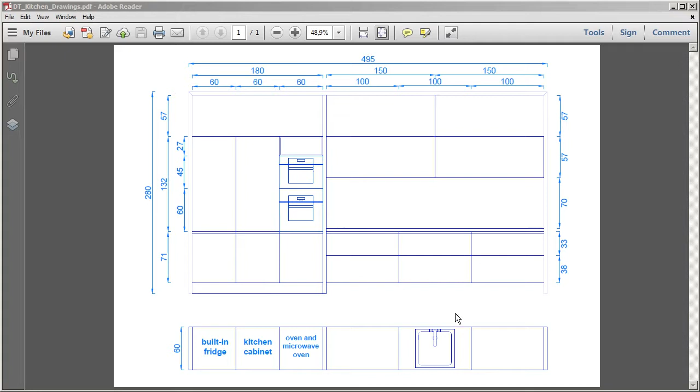On the right side we have 4 huge kitchen cabinets, below that countertop with faucet and sink, and below that we have 6 drawers. Here on the very bottom you can see we have 15 centimeters high toe kick, and on the right side we don't have toe kick because here we will place small LED lamps. Here in the middle we have a 5 centimeters thick plank, and we also have 3 more planks around the kitchen. That was our main part.

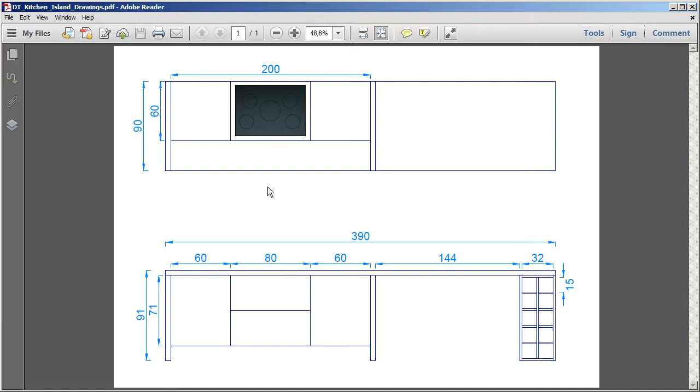Now let's take a look on kitchen island. We have here on left side 1 kitchen cabinet and the same one on the right side, and here in the middle we have 2 drawers. We have here wine shelves, and here on the top countertop with induction hob, and above that we will place cooker's hood. Now let's jump real quick to our scene.

For this tutorial I prepared a simple scene. Let's hide the ceiling real quick.

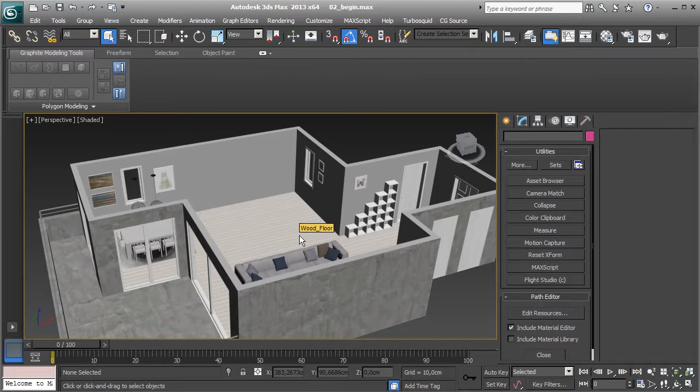Yes, you can render your kitchen in studio setup, but from my experience I know that clients really prefer to see their kitchen in their own apartment or house. So it's always good practice to go in their home, take a few photos, make measurements, and then come back and try to recreate their apartment or house, and then place the kitchen in their home. It will really pay off, trust me.

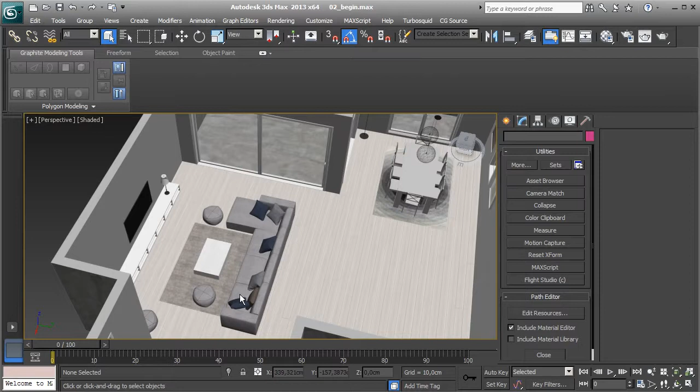Okay, here we have a simple dining room with table, carpet, and a few chairs. I've placed here a few paintings and 2 ceiling lamps. We have here a living room with simple sofa and carpet, coffee table, TV, and shelves. You don't really need to go too much with details, you don't really need to fill these shelves with books and something else, but making the dining room and living room something simple like this will really bring up your renders. So that's it for this lesson.

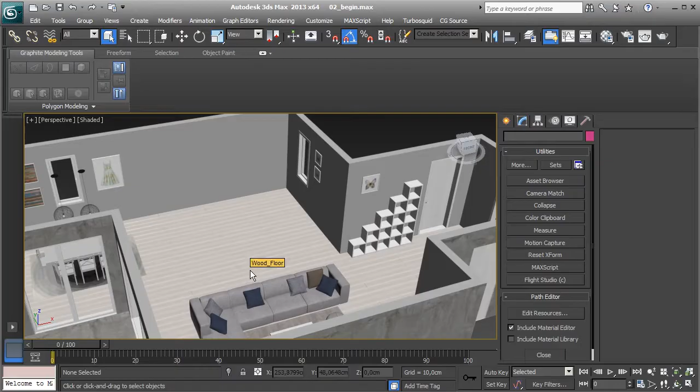In the next lesson we will make our kitchen blocks. Make sure you have correct settings here. Right click on snap toggle icon and make sure you have checked vertex only. Now open up the layers menu and make a new layer to keep things organized, and we are ready to go.

Now let's take a quick look on our CAD plans again, and we will start by making these 3 surrounding planks. They are 280 centimeters high and 495 centimeters wide, and we have a width of 60 centimeters.

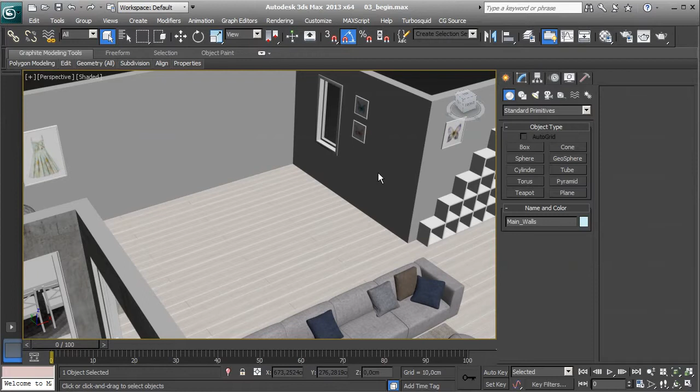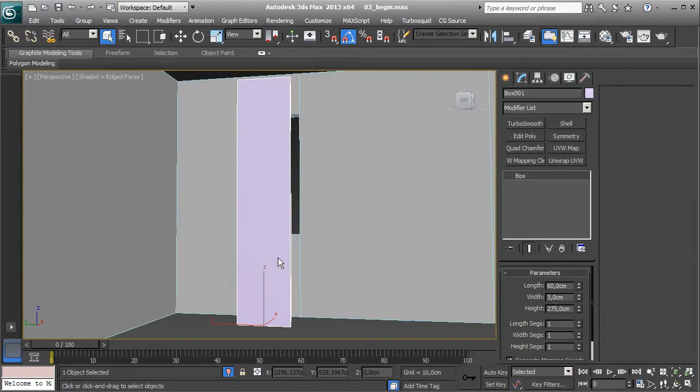So let's take our walls and press Alt Q to isolate them, and we need to create a box here and type in dimensions 60, 5 and 275. Now zoom in, and I will activate or deactivate snaps by pressing S on keyboard. So let's snap this box to this corner. Okay, convert that to editable poly.

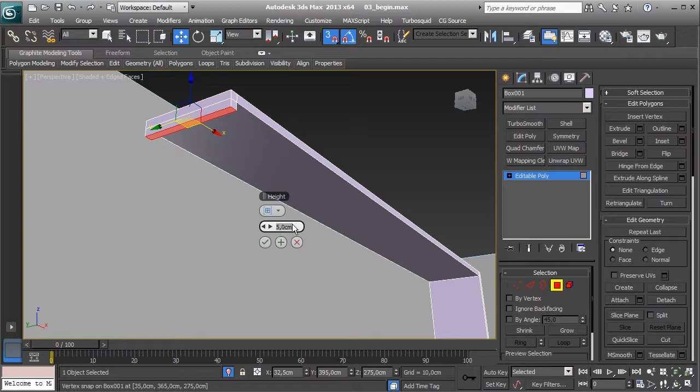Select this polygon here and extrude by 5 centimeters. Okay, now extrude this one by 485, hit plus button, and 5 more. Okay, and now select this one and extrude by 275. Okay. Now we have our surrounding planks and we can move on.

Let's isolate that. Now we will start by making the toe kick. In this case it is 15 centimeters high. It can be 5, 10 or 15. In this case it is 15. And it is 180 centimeters wide. Okay.

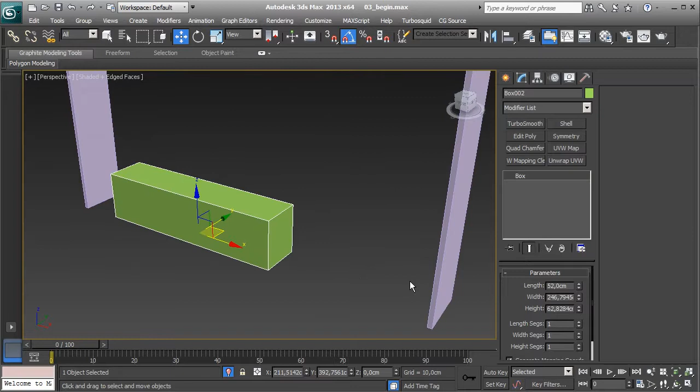A new box. We will make it 52 centimeters deep, but it can be from 50 to 55, something like that usually. And 15, zoom in and snap it to that wall. Okay.

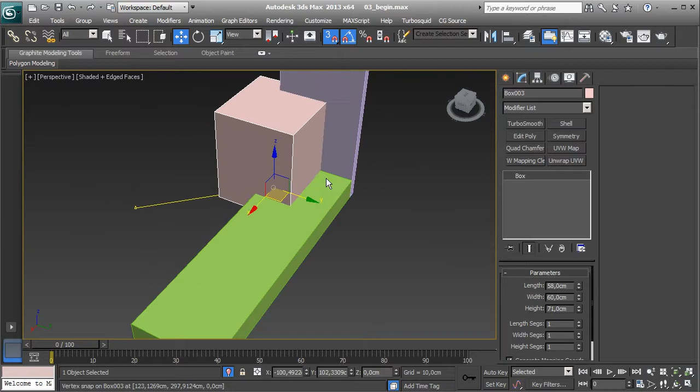Now these 3 kitchen cabinets, they are 71 centimeters high and 60 wide. Okay, one more box. 60, 71, and we will put 58 length because we will make 2 centimeters thick doors on them after. Okay. Shift and drag to make a copy. Snap again. Shift and drag. And snap.

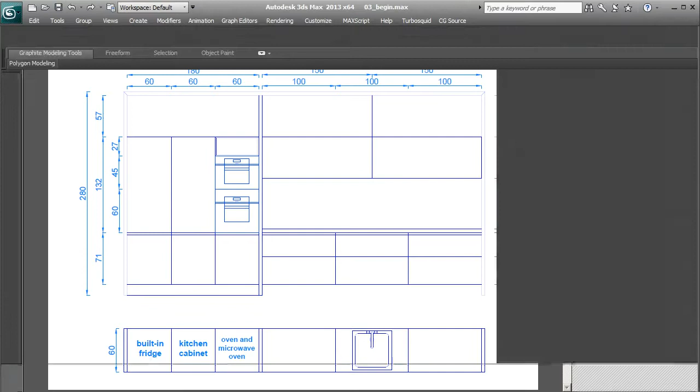Okay. Now we need to make these 2 kitchen cabinets and they are 132 centimeters high. So let's copy this box once again. And snap. Copy and snap. Okay. Now we have oven and microwave and this small shelf.

Ovens are usually 60 centimeters wide and 60 centimeters high. So copy this box one more time. 60. Snap.

Now we need to make our microwave, 45 centimeters height. And we need one more box for our small shelf, 27. Okay, and we need one more box here on the top for our kitchen cabinet.

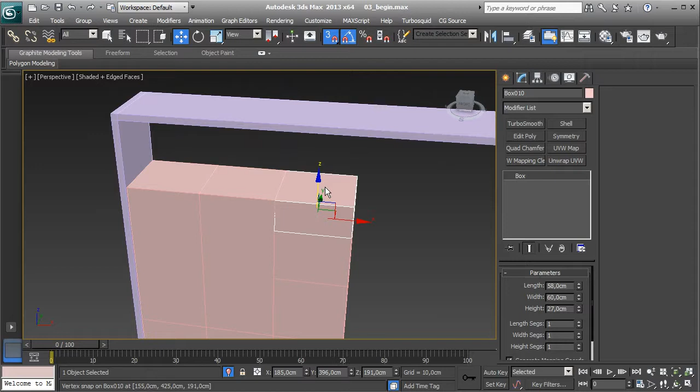Make one more copy. 180 and height, I guess 57. It is. And we can snap that right here. Okay. Now we need to make this plank.

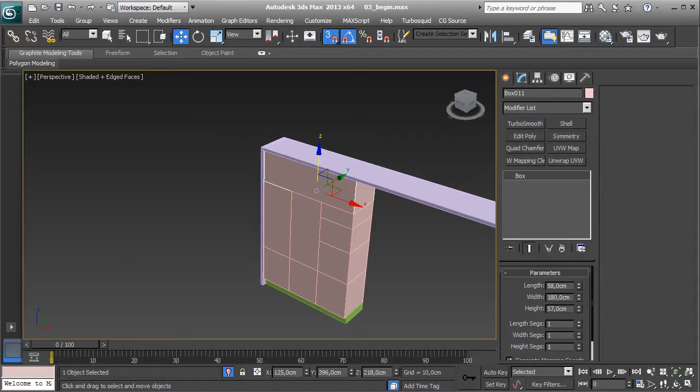Okay. Create a box. Okay. 275, 5 and 60. And snap that here.

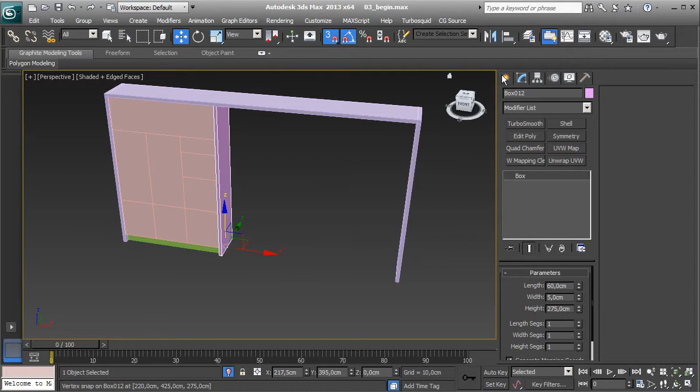Okay. Now we will create these 4 huge kitchen cabinets and they are 150 centimeters wide and 57 centimeters high. Okay. Usually top cabinets are between 30 and 35 centimeters deep. In our case they will be 35, so we will make this box 33 because we will have doors 2 centimeters thick again. 150 and 57.

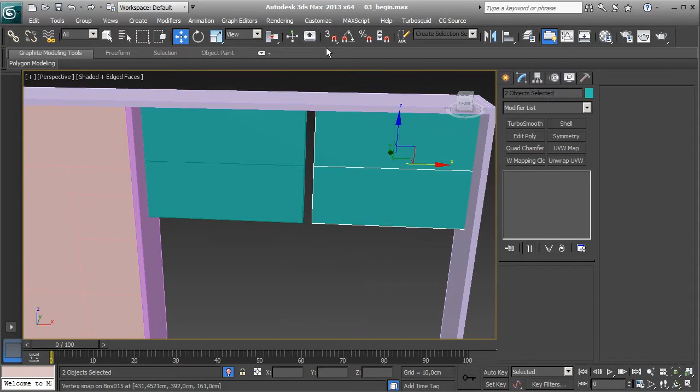Okay, and let's snap that here. Create one copy and snap. Select them both. Shift and drag. Okay, now we have to make these 6 drawers and countertop. So let's create one more box.

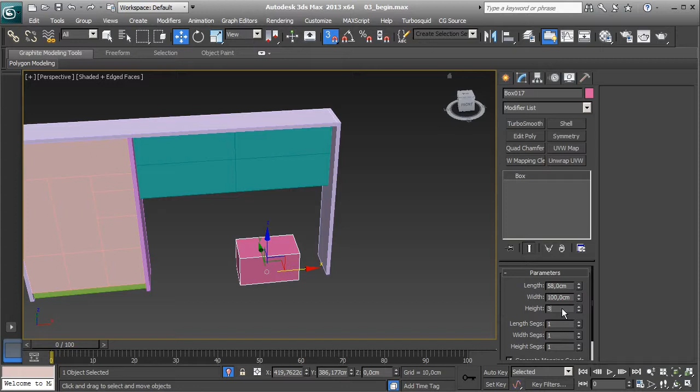58, 100 and 38. Let's snap it here and move it up by 15 centimeters. Okay, shift and drag to make a copy, snap, one more copy, and snap. Now second column here, 33 centimeters.

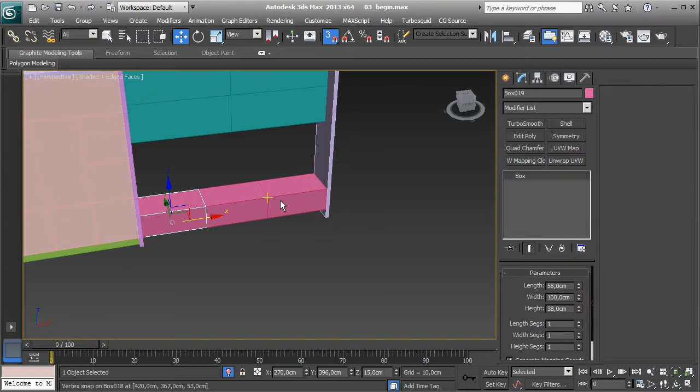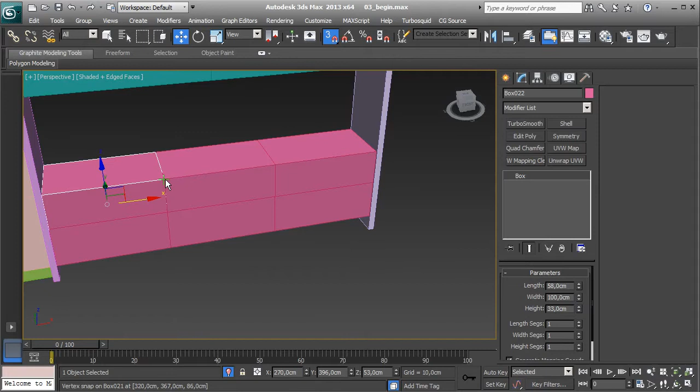Okay, snap, copy, snap, copy. And we need to make our countertop. Okay, so 60, 300, 5 centimeters thick, and we can snap it right here.

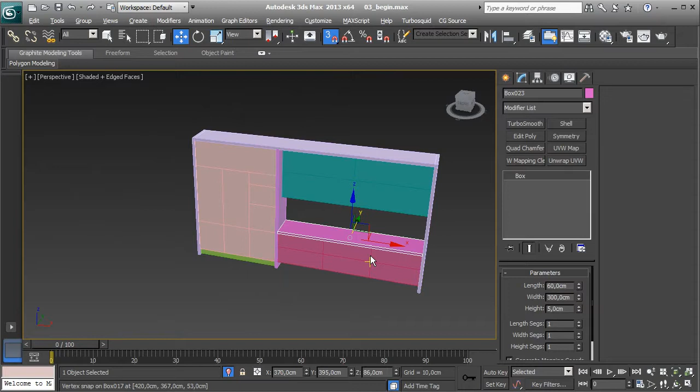Now when we have the main part of our kitchen blocked out, we can start working on island in the next lesson. Let's take a quick look on our CAD plan again.

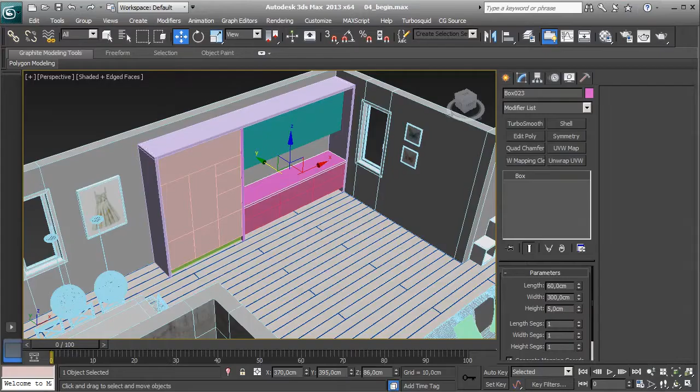Let's take our walls again and isolate them and create a new box. Okay, 5 centimeters, 390 and 90.

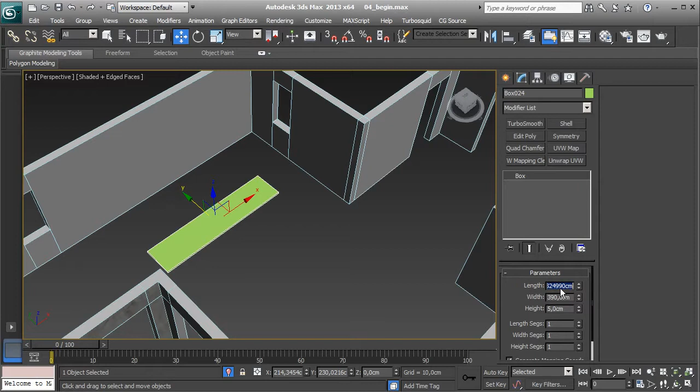Let's move that here, zoom in a bit, turn on snaps and snap it to this vert here. Okay, now I will turn on absolute mode here and we will move countertop 86 centimeters up and we will move it from window 10 centimeters.

Okay, now we can isolate countertop and we will create these wine shelves. Every piece here is 2 centimeters thick and we need to create first one box here, 92 and 86. Okay, turn on snaps and snap it to this corner.

Now create a copy and snap and move by 15 centimeters. One more copy and snap it right here and move by 15. Okay, one more box,

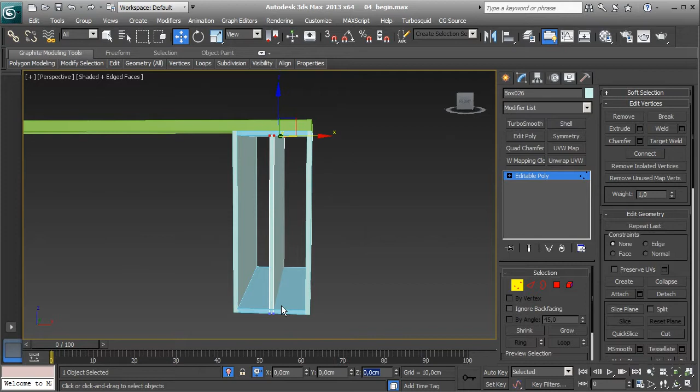Convert it to editable poly, and move down these top verts by 2 centimeters and move up these 4. Okay, now select these edges and hit connect, make 4 segments. Okay, chamfer them by 1 centimeter and hit OK.

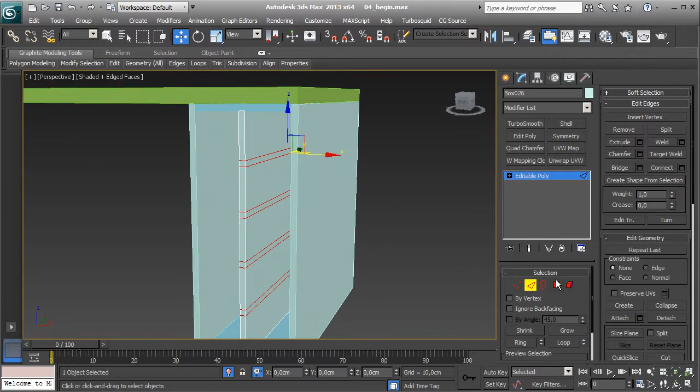Now select these polygons here and hit detach and detach them as a clone. Okay, now select these polygons on other side and same thing. Now we can delete these edges, we don't need them anymore.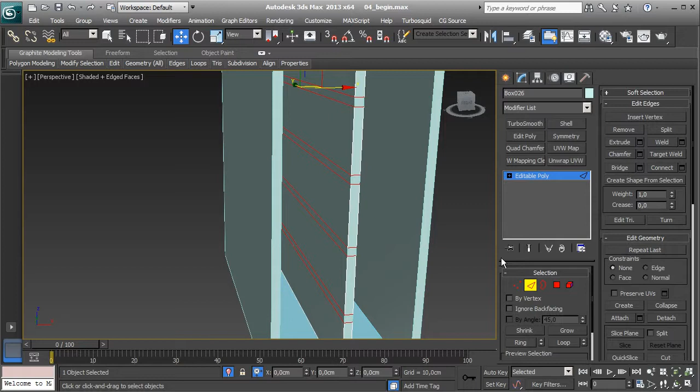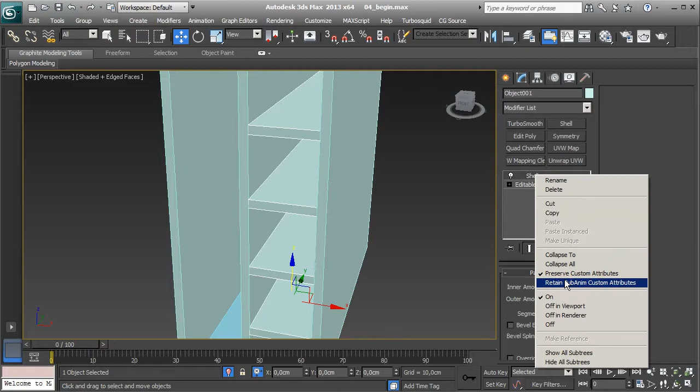Now select these polygons and apply shell modifier with 15 centimeters outer amount and collapse that and convert that to editable poly. Same thing with these polygons on this side, so apply shell modifier and collapse that.

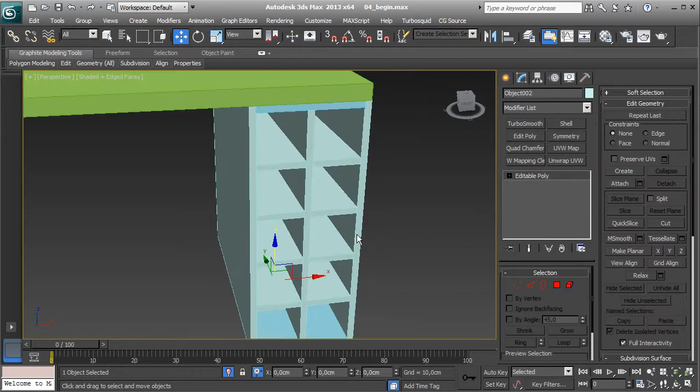Okay, now we can move on other side. On other side we have 5 centimeters thick plank, 1 kitchen cabinet, another one, and 2 drawers. So let's create them.

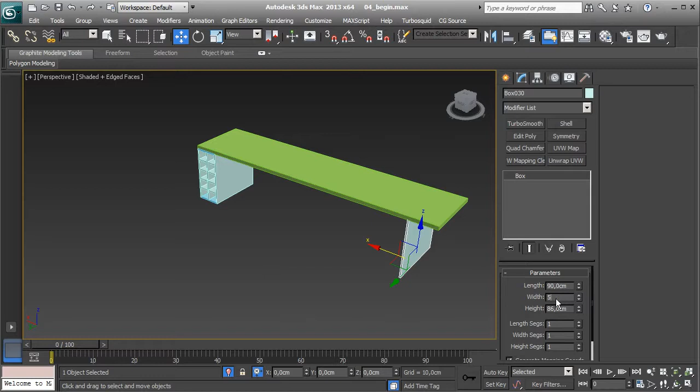Take this box here and make a copy, change width to 5 centimeters and snap it to this corner here. Okay, now we need our boxes for cabinets. Let's change this length value to 58 again, because we will have 2 centimeters thick doors, width to 60 and height to 71. And let's change the color so we see the difference and snap that here.

Now we need one more copy, and this will be box for our drawers, so 35.7 and 80, snap, copy, snap, and one more kitchen cabinet, snap.

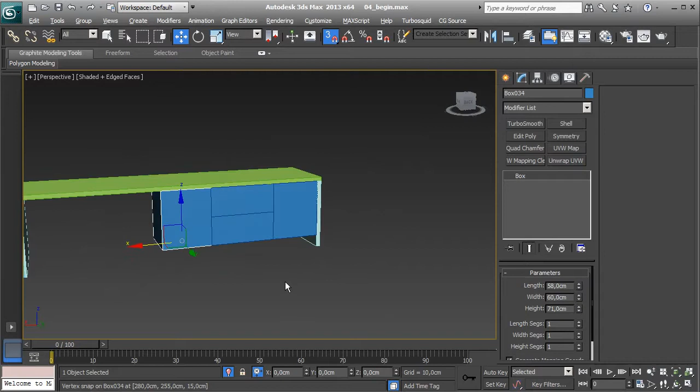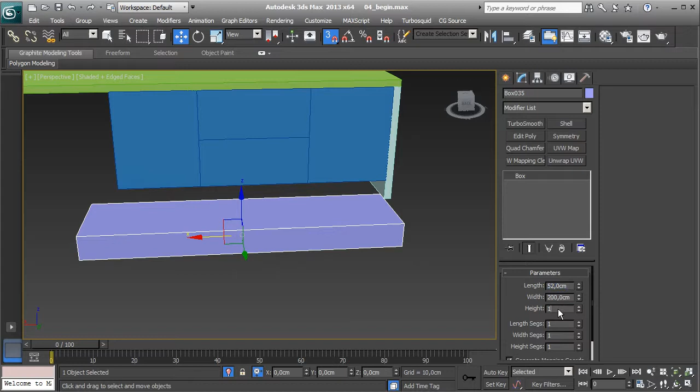Okay, and now we need one more box for our toe kick, and it will be 200 centimeters wide and 52 and 15. And let's grab it and snap.

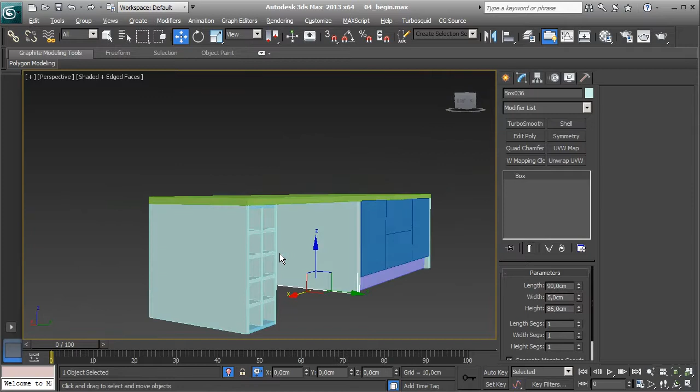Okay, and one more thing, we need one more plank on this side. Okay, and snap it. Now select these boxes here and push them in 2 centimeters so we have space for our doors.

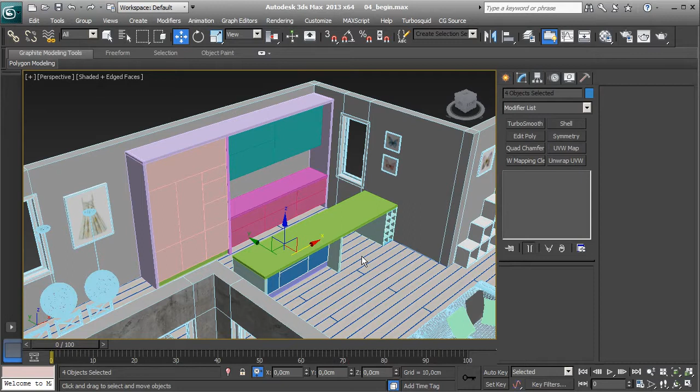We have blocked out our kitchen and we can move on. We have doors with built-in handle and we have doors without handles, so you can open them by pressing this area here or this area here or here.

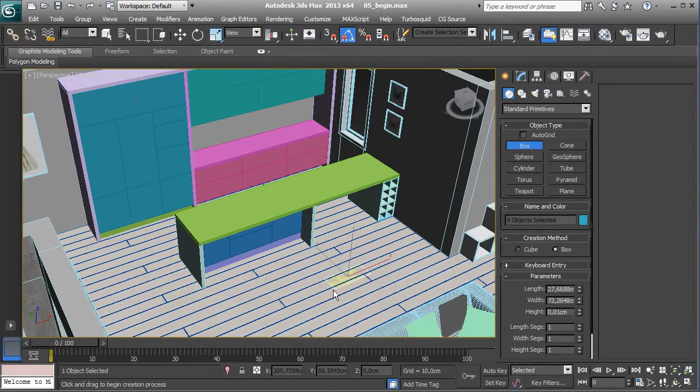We will start by creating doors with handles, and as you can see I've changed the color of these boxes so we can see edges much better. So let's create a box here and let's go to isolation mode and type in dimensions for length 2 centimeters, width 60 and height 67. We need doors to be 71 centimeters high, but we will start for now with 67.

As you can see, we have thickness of 2 centimeters, but in real world doors are usually from 1.8 to 2.2 centimeters thick. I always use 2 centimeters thickness in 3D because it's much easier to work with round numbers, and also these few millimeters won't be visible in renders.

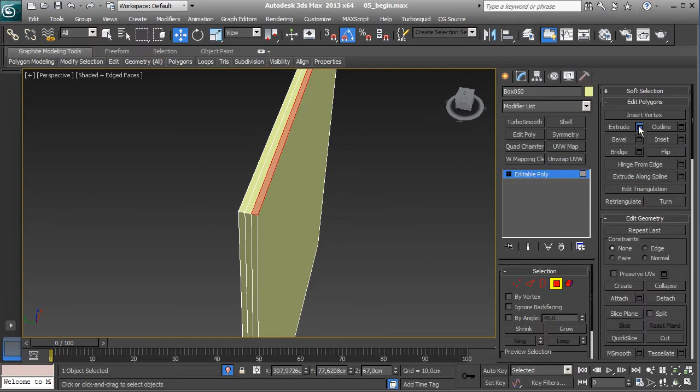So we can convert that to editable poly. We select this edge and hit ring, connect with 2 segments, extrude this polygon 1 centimeter and extrude this one 4. Now we have 71 centimeters high doors.

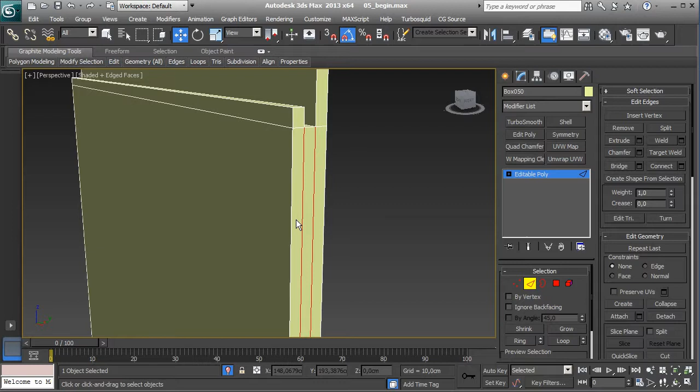Now we can select this loop and this loop. I'm selecting the loop by double clicking on edge, and I will delete them by pressing Ctrl and backspace. Same thing with these edges, but I will deselect the inner edges.

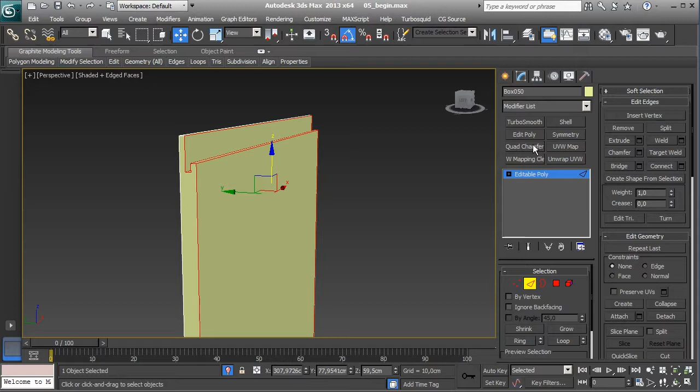Now I will select all edges with Ctrl A, and deselect these edges. Now I will apply quad chamfer modifier. If you don't have quad chamfer installed, I will provide a download link in reference files, and if you are a latest Max user, you should have that modifier by default. So apply quad chamfer, amount 0.2 with 2 iterations, and collapse that.

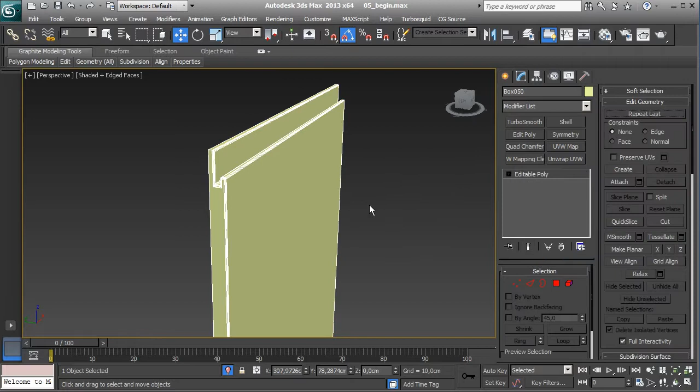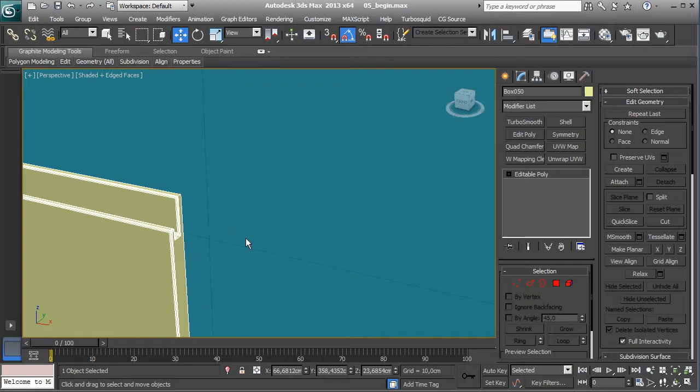Okay, now we have our doors and we can start placing them. Let's bring up the layers menu and hide everything except kitchen. Press Z to zoom in, and now turn on snaps.

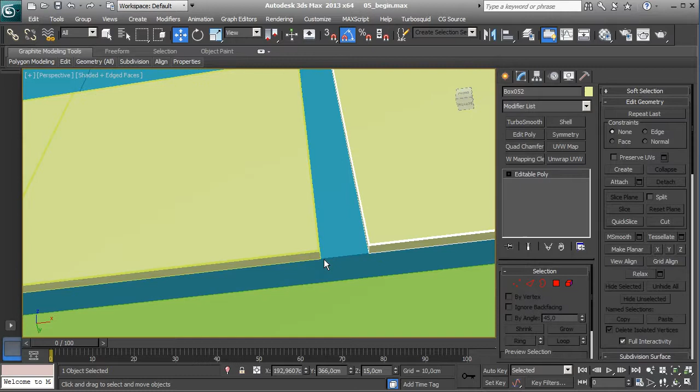We will snap doors in place, create a copy. Okay, one more time, snap and copy, and snap. Now we need doors for kitchen cabinet and built-in handles.

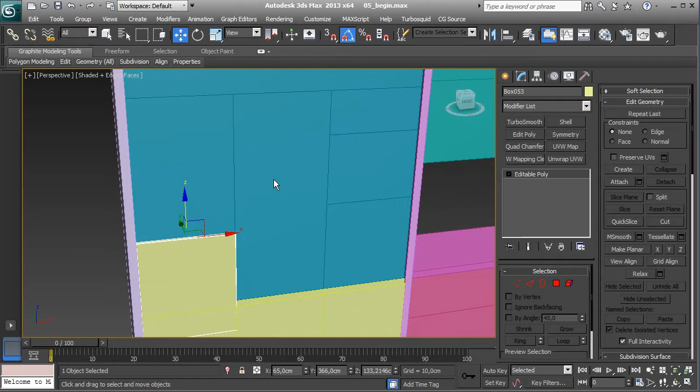Now you will see why I didn't chamfer every edge on that doors, so we have good snapping points, and we can change the dimensions of doors anytime. So move them down a bit, zoom in, and snap.

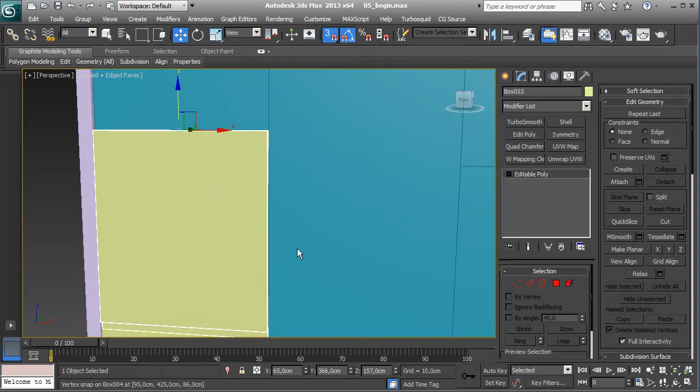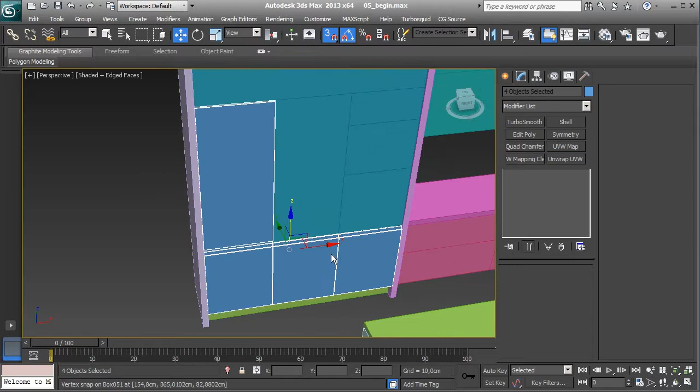Okay, and now we can select these doors, move them up, zoom in, and snap. And let's change color of these doors also so we can see them better, to something like that. Okay, and make a copy and snap.

Okay, we have this little box here that represents our future shelves, so let's convert that to editable poly, and let's bevel that polygon by 2 centimeters, inset by 2 also, and extrude in by 58. And we have our shelf here.

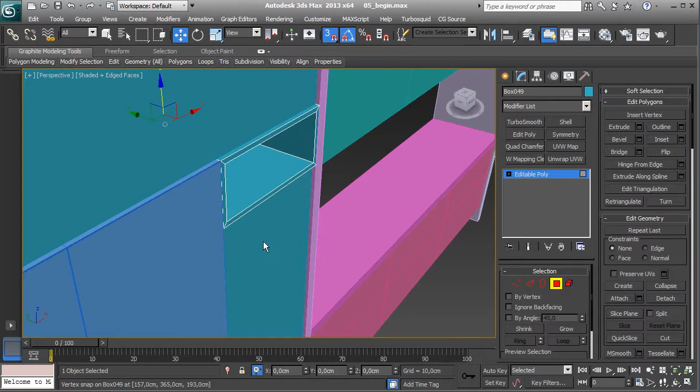Okay, here is the place for oven and microwave, and we will make them later. Now we can copy that doors.

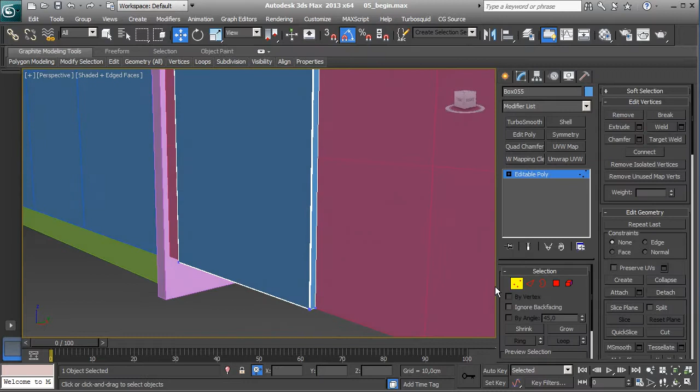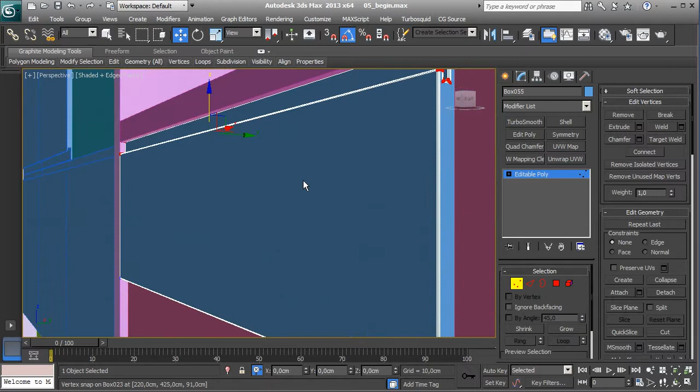Actually we will snap that here, and now we'll snap these doors here and select these top doors and push them down. And snap.

Now we can create 2 more copies, and we can also snap them like that.

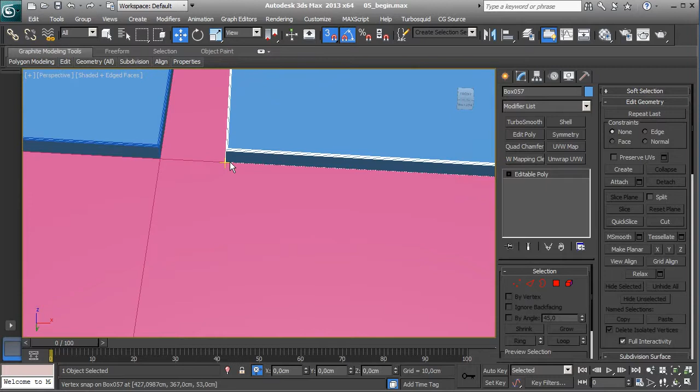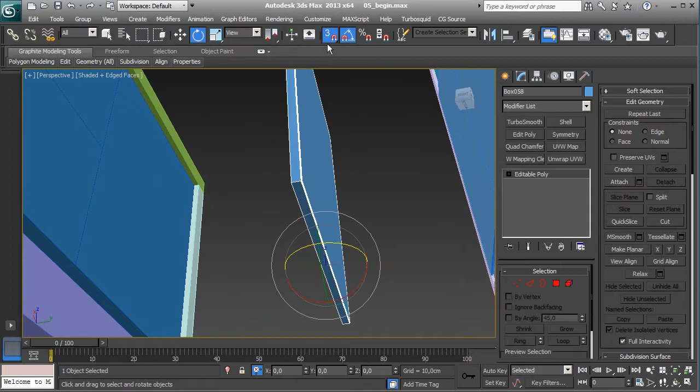Okay, and now we need 2 more doors, actually 3 on our island. So create 1 more copy, rotate that by 180 degrees, zoom in and snap. Like that. Okay, and let's change color here too.

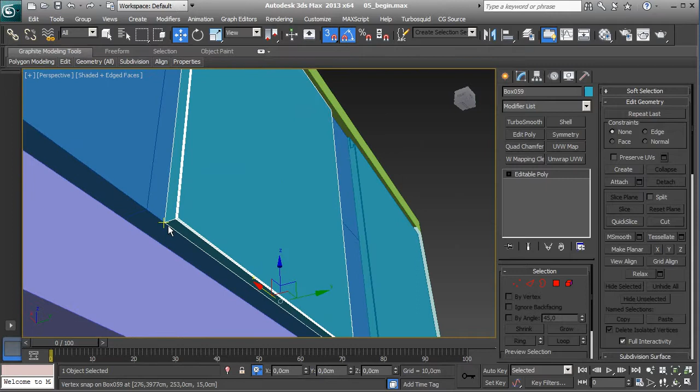So we can see the difference. Create a copy again, turn off snaps. Okay, now select that doors and snap them, and push this up.

And now one more time, shift and drag to copy these doors. And snap.

Okay, now when we have all our doors with handles finished, we can move on, and in next lesson we will finish the rest of the door.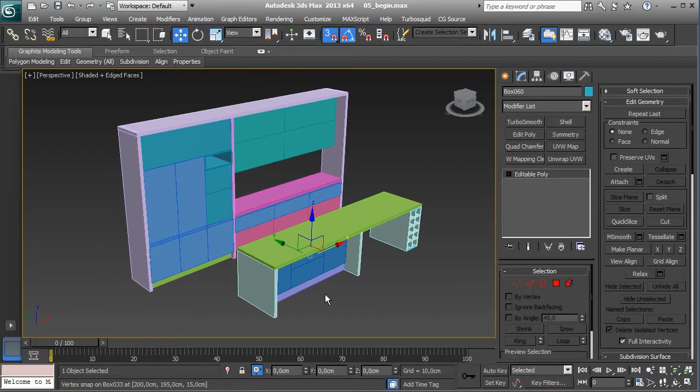This box and create a copy, and we will change length to 2 centimeters and snap that right here.

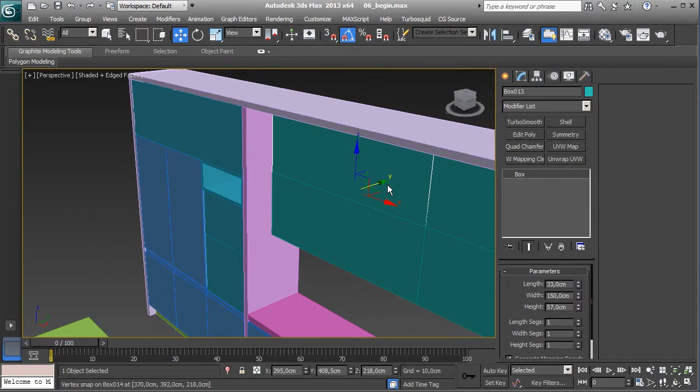Okay, now we can make a copy of that box. Let's change color to something more visible and change thickness to 2 centimeters and snap that right here.

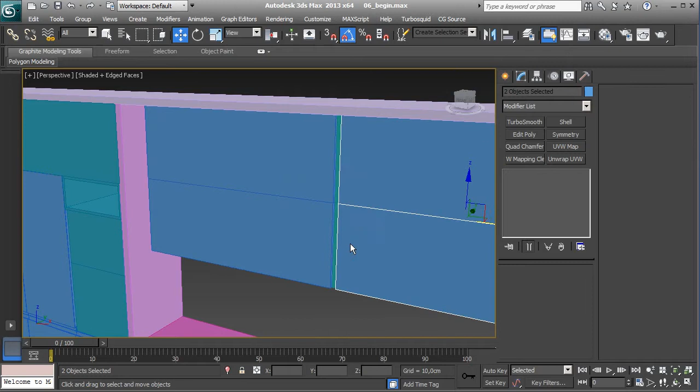Make a copy, snap, select both boxes and copy them and snap.

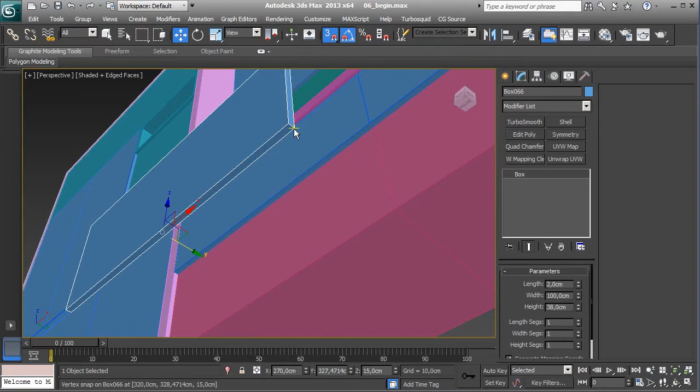Okay, now we need to copy this box, change thickness to 2 and also change color to blue, and snap. Copy, snap, and one more time.

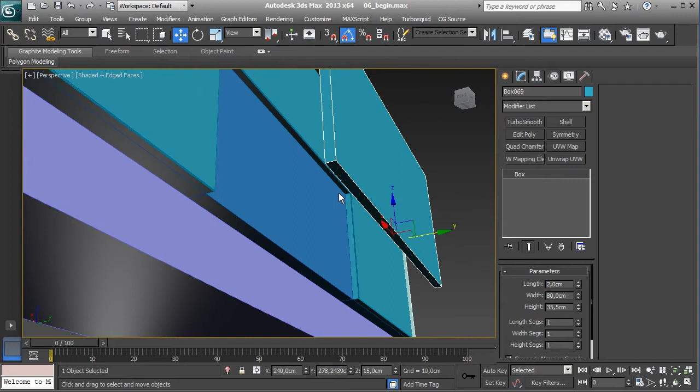Okay, and we need one more box here on this drawer. So create a copy, change color and thickness, and snap like that.

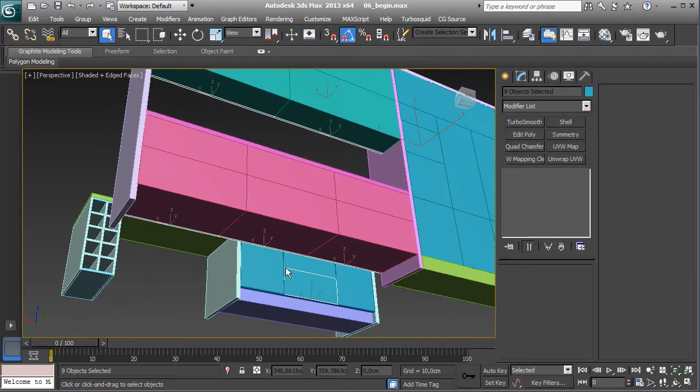Now we can select these new boxes and this one, and we can apply edit poly modifier, select all edges and chamfer them. 0.2 with 2 iterations. We chamfered all edges so we can catch up lighting nicely and reflections in our final renders.

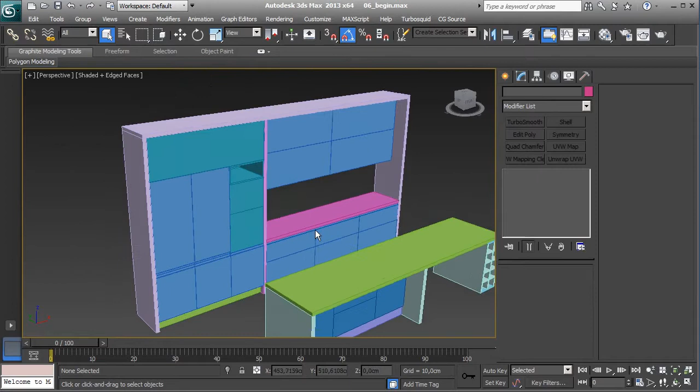Okay, now we can create 2 more boxes here for oven and microwave, and we will model them later. Snap, copy, and snap.

Now we can select countertop and these 2 side planks, and we can also chamfer them, 0.2 and 2 iterations.

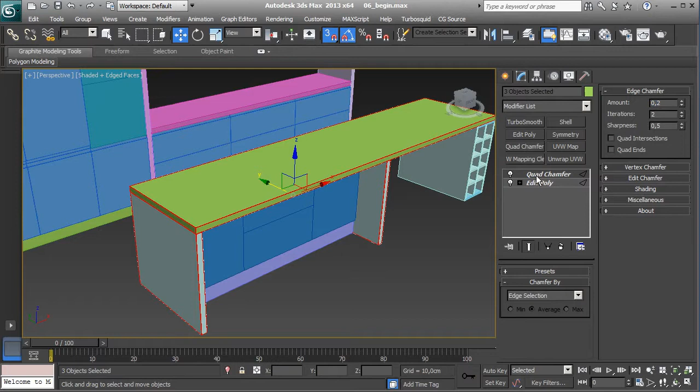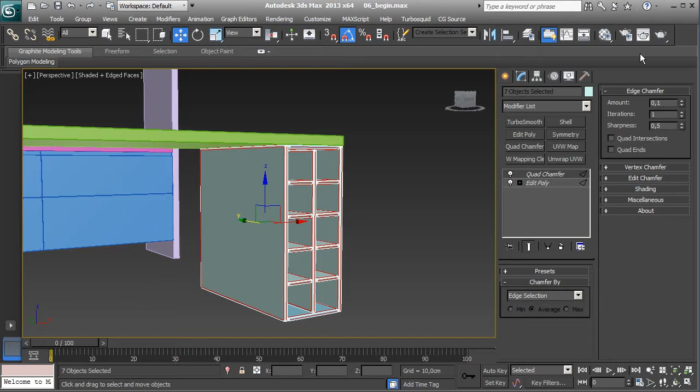Wine shelves also. Select all edges and chamfer, this time 0.1 with 1 iteration. Collapse all.

Okay, this countertop we will leave for now. We will chamfer that when we model sink and faucet. We can convert that to editable poly, select all edges and chamfer, and collapse all.

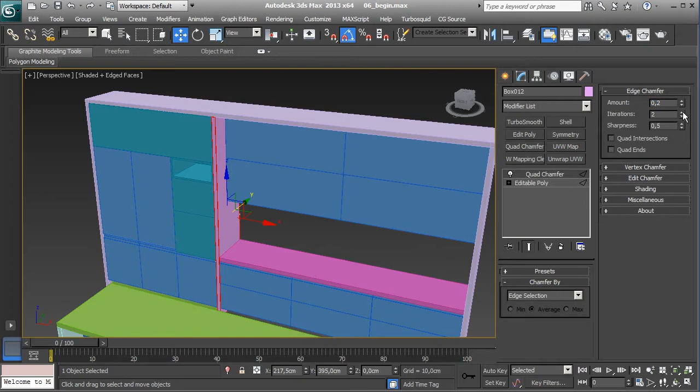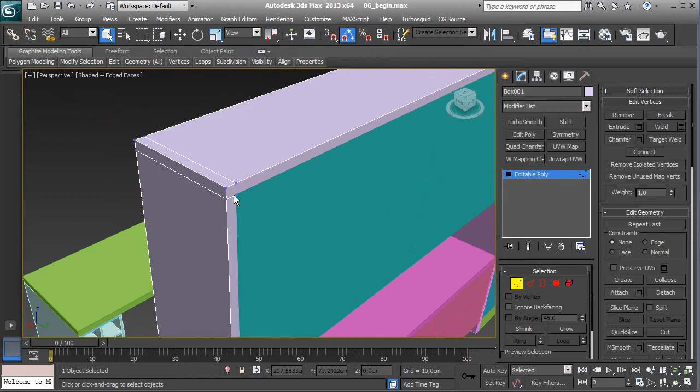Now we need to make a few changes here, and we will select these 2 edges, connect them, same thing here and on the other side, connect and connect. Now select these edges and delete them with Control Backspace.

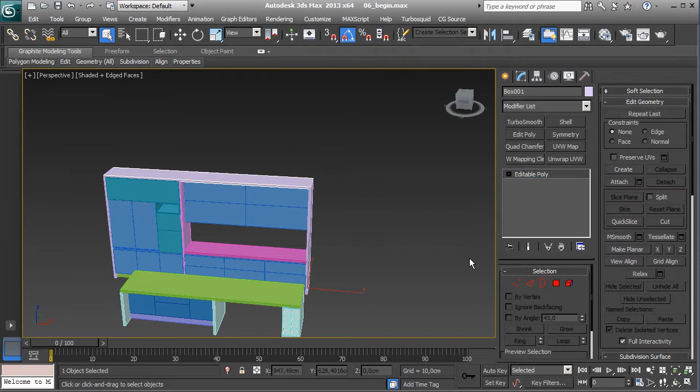Now select these polygons and detach them. Same thing on other side, detach. And now select borders and cap. Here also cap, and 1 more cap.

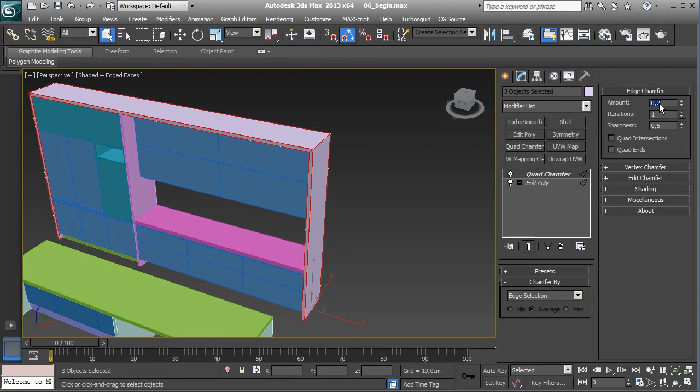Now we can select these 3 planks and apply edit poly and chamfer them, and collapse all. Okay, that's it for this lesson, and in the next lesson we will start modeling appliances.